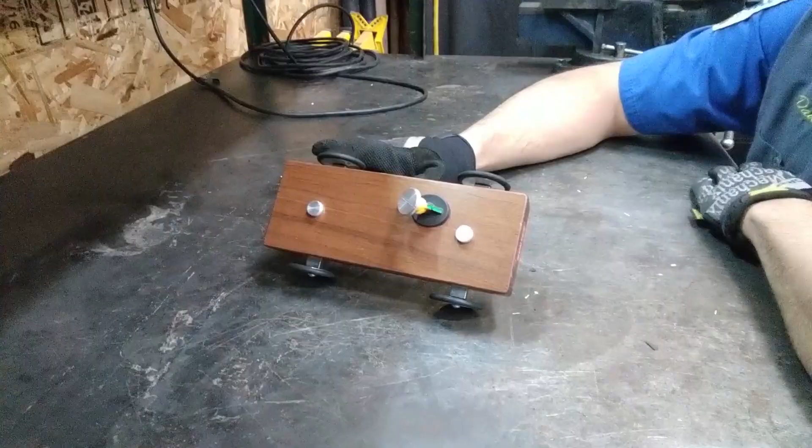In these exaggerated instances, it's a little easier to see visually how some of these tire wear angles can affect the tires and the vehicle's handling. So I'm going to start with this alignment model car from Hunter and talk about the most important angle that's adjustable on all vehicles. It's the only angle required to be adjustable on all vehicles, and sometimes the only one available for adjustment, and that's toe.

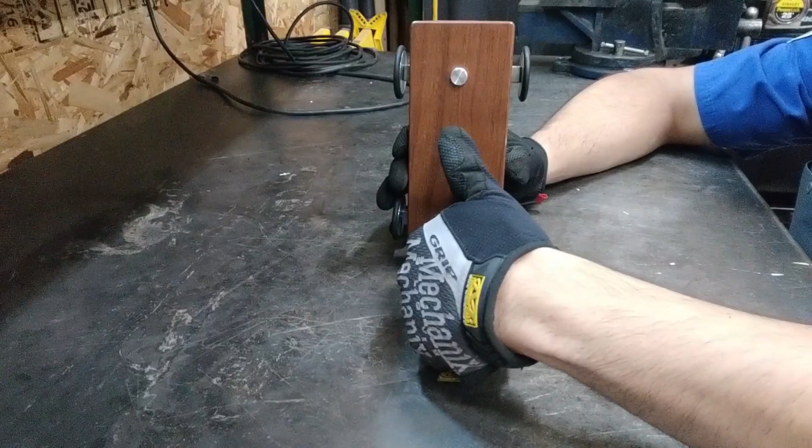There are two reference points we're going to use. The first is the geometric center line of the vehicle, an imaginary line drawn directly through the center of the rear and front axle, passing through the vehicle. The other is the zero reference line, represented by a true vertical line. So when we refer to some of these measurements, they may be in reference to a true vertical line, a zero reference line, or the geometric center line of the vehicle.

Toe is defined as the distance across the front of two tires compared to the distance across the rear of the same two tires, on the front axle compared to the rear. Referring to toe in that manner is also known as total toe, comparing one side against the other. Individual toe has to do with using the geometric center line and only referring to one wheel and its relationship to the geometric center line.

Individual toe is the distance across the front of a tire to the geometric center line compared to the rear of that same tire to the geometric center line. If those distances are equal, it has zero toe.

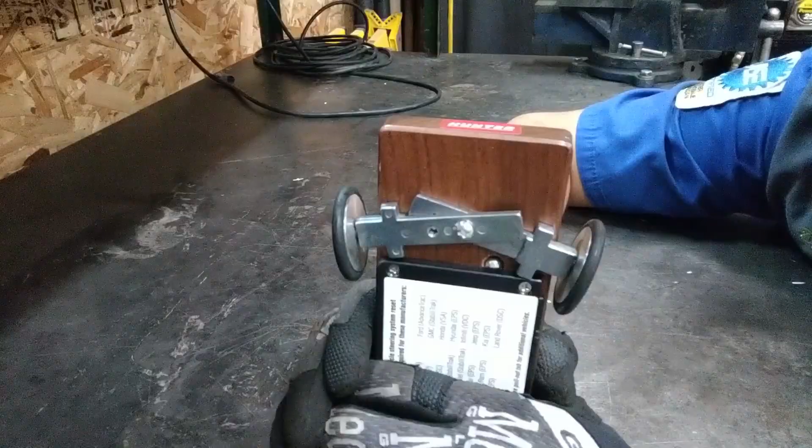So for real life tires: toe in means the front distance of the two tires is closer than the rear distance of the same two tires. Toe out means the distance across the front of two tires is farther than the distance across the rear of the same two tires.

What's this going to do when you're driving? If we picture a toe-in scenario and the vehicle is going straight, the tire is going to be scrubbing partially against the surface in a lateral motion as it rolls. The vehicle is going to prevent these tires from actually joining together on their intended straight paths.

And similar to toe out, they're not going to leave the vehicle. The vehicle is a rigid piece, and it's going to keep them all together. So what's going to happen is, let's look at this tire. As the tire is rotating this way, it's also going to be scrubbing along in this motion right here.

So if we think about the forces acting on that tire tread coming from the ground in this direction, it's going to take this outside edge and start scrubbing it. And so this tire, in an exaggerated manner, is going to be rotating and scrubbing forward.

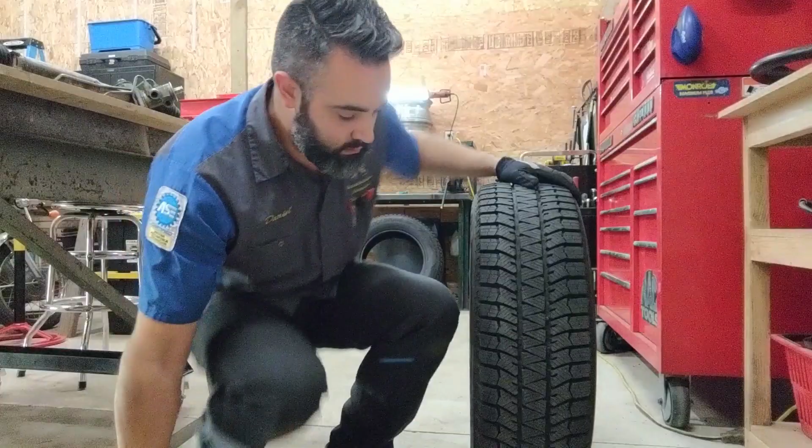Camber is the next angle I want to discuss. The definition of camber is the inward or outward tilt of the top of the tire in reference to a true vertical line as viewed from the front of the vehicle. So if you're looking head on to the vehicle, and let's say the vehicle is where I'm at, and this is the tire, the outward tilt is positive camber. The inward tilt of the top of the tire in reference to true vertical is negative.

Using a framer's square, zero camber is vertical. Positive camber is outward. Negative camber is inward.

Camber is a tire wear angle, but it has to do with the pressure on the tire surface that will wear the tire. A little bit one way or the other isn't going to drastically affect the tire, and again I'm talking about angles between 0 and 1 degree, plus or minus 1 degree off of 0. What will happen though, in an extreme scenario which we can actually see nowadays, the amount of pressure at that contact surface with the ground on a very extreme camber setting is going to cause excessive wear on that surface because it is taking more of the vehicle's weight and it's not evenly distributed across the tire.

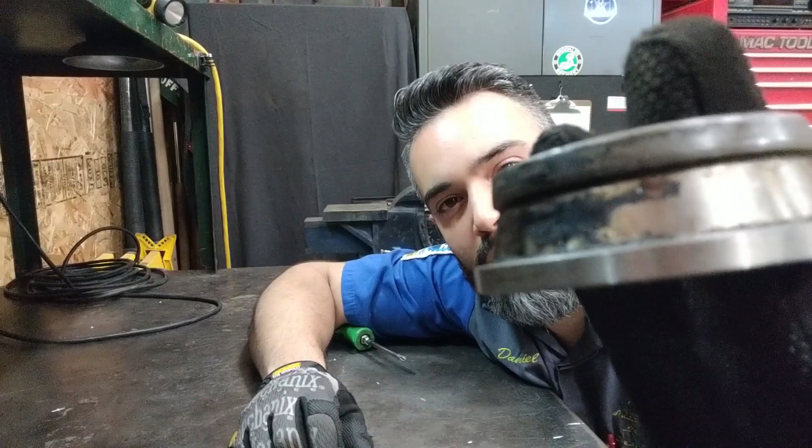One of the general rules about camber is that a vehicle will tend to pull towards the side with the most positive camber. So remember, positive is when the top of the tire is tilting outward from the vehicle. That can be illustrated by this. This is an inner bearing race from a tapered roller bearing. See some interesting spalling occurring there. No wonder this was in need of replacement.

A true vertical tire, or a tire with 0 camber, will have an even contact patch across the surface of the tire tread. Positive camber is going to act like a cone. Negative camber does this too, but negative camber, the way that the forces act from the tire tread back to the vehicle, don't influence it as much as positive camber does. So notice what that contact patch does to its rolling direction.

As the tire is tilted outward, that contact patch with the ground becomes distorted and takes on a conical shape on the contact patch of the tire, resulting in the force acting on the steering and suspension system from that positive camber and influencing the vehicle to pull in that direction. If it was even side to side, there wouldn't be any more pull one way than the other.

Excessive out of spec positive camber is going to also wear the tires just like negative camber would. The only thing is, with positive camber or less negative camber - because you can still have two negative cambers, just one a little less negative than the other - the pull will go towards the side of the more positive or the less negative. So it doesn't always need to be a positive value in order to be more positive; it just needs to be less negative or more positive. Generally what we're looking for is within half of a degree side to side, so our cross camber needs to be less than half of a degree to avoid that steering pull characteristic when performing an alignment.

In order to define caster, or the caster angle, we need to first define and understand what the steering axis is, because caster has to do with the degree tilt of the steering axis. Let's take a look at an example. I'm going to use the MacPherson strut as an example for measuring caster. Caster is determined by the steering axis.

The steering axis is an imaginary line drawn through the lower pivot point down here at the ball joint, and an imaginary line up through the top pivot point. So this one pivots up here on the strut bearing and pivots down here on the ball joint. Now that isn't directly in line with the strut body, since our ball joint is over here and our upper pivot is over here.

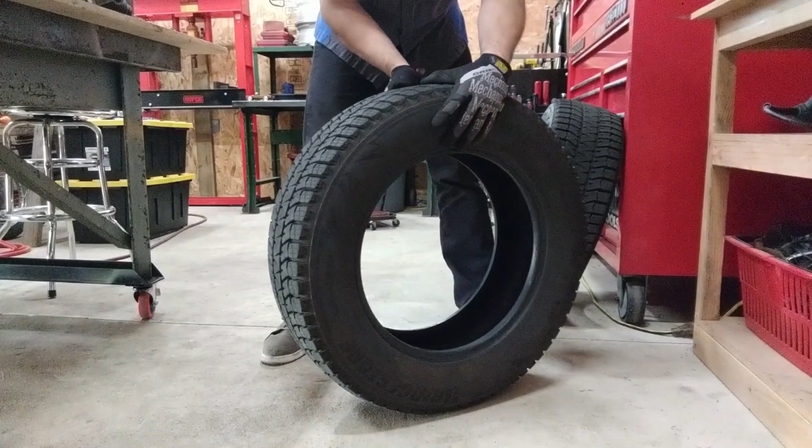The steering axis isn't something you can see just by looking at it or putting up a measuring tool. The steering axis isn't always going to be a vertical pivot point directly in line with the center of the tread. You might guess where I'm going with this. We can't look at this angle directly, but we can see where it pivots in the steering at the top and at the bottom, and we can imagine the line drawn between those two pivoting points, though we can't know what that is for sure.

So how are we going to do this on the alignment machine? Well, it's a dynamic angle. So just by looking at it and mounting up the equipment, we cannot tell what the steering axis is based off of that information.

The definition of caster is the forward or rearward tilt of the steering axis in reference to a true vertical line, as viewed from the side of the vehicle. Picture a motorcycle: the handlebars are located somewhere behind the front wheel to whatever degree, and that degree can be considered caster, because this is the operating angle of the steering axis.

Picture a street bike where the angle is very steep, almost vertical, compared to a modified chopper where it's drawn out and acting on the front tire from a ways back. That would be positive caster. Negative caster would be if we were ahead of the wheel and tilted forward as viewed from the side of the vehicle. Thinking about the forks on a motorcycle is a pretty easy way of understanding it.

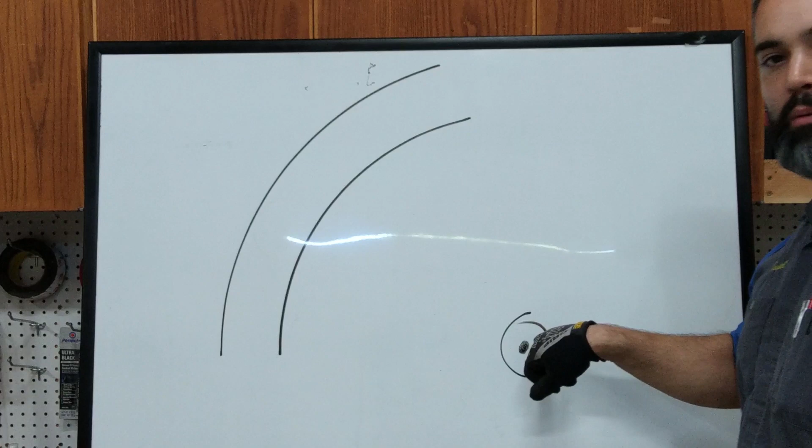This is the center point for the radius of each of those arcs. The inside radius is shorter than the outside radius, so it's making a tighter turn compared to the less aggressive turn at the longer radius.

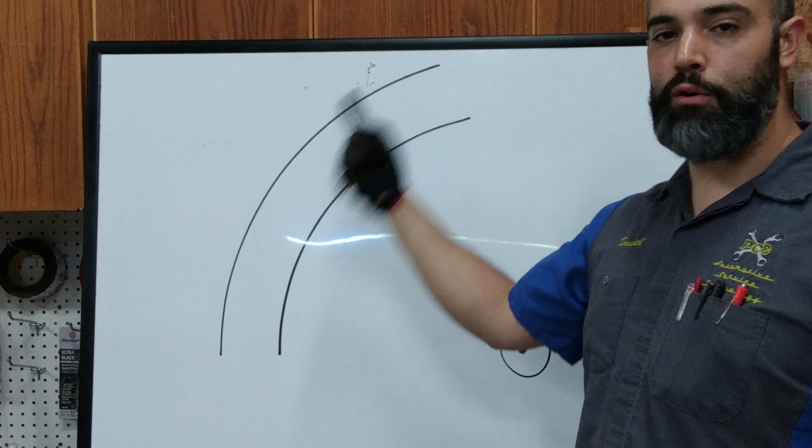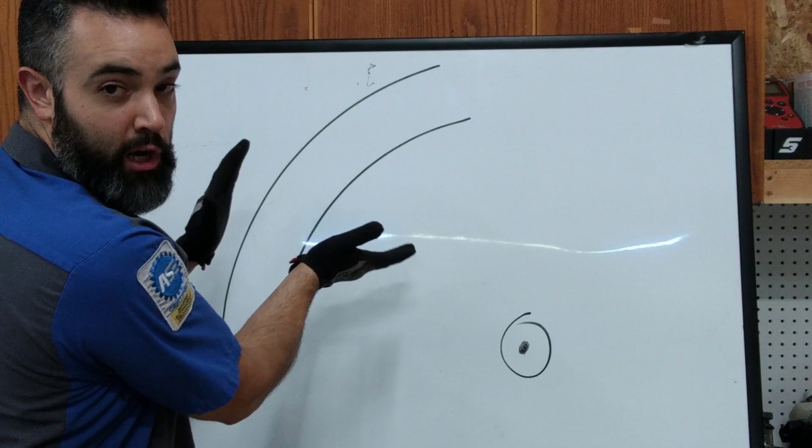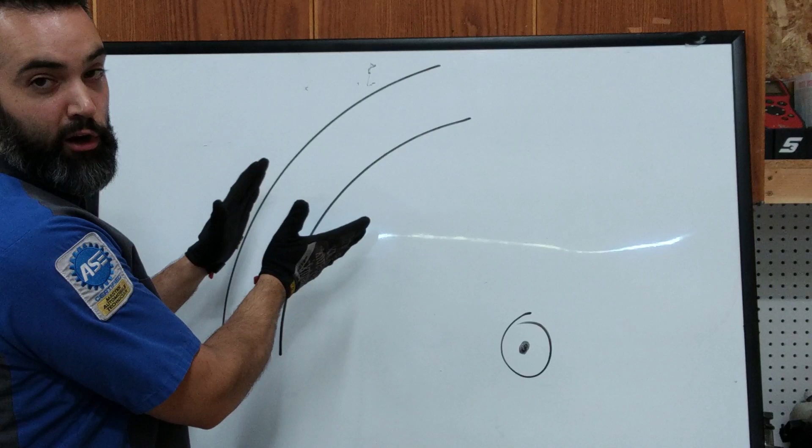So if the vehicle is turning about a point, the inside wheel needs to follow this curve and the outside wheel needs to follow the other curve. The result is the inside curve is a sharper turn than the outside, so the inside wheel will need to turn sharper than the outside wheel. They'll both turn, but the inside turns sharper. Since the front of the two tires will be larger than the rear of the same two tires, not parallel, this is what we call toe out on turns.

Abbreviated TOOT, or toot. In the PDF slideshow that goes along with the alignment topic, it will go further into diagnostic angles. Reading the chapters on alignment and going through more of these slides with diagnostic angles will be helpful in the future when you're working in the lab. We're not going to get too deep into that at the moment.

I want you to understand the basics of a four-wheel alignment and how that process goes. So I will walk you through that process with a vehicle at the school on an alignment hoist, running through the procedure. Remember: tire pressure affects it. Do an inspection before getting on the alignment hoist to find any loose, worn, or possibly bent components. Road test the vehicle to find out what it's doing before you align it, so you have something to compare it to. And the alignment process is going to be rear, camber, and toe.

You're likely not going to find a caster angle on the rear unless you have some extreme steering on the rear axle. So you do rear camber, then rear toe. Then you go to the front and do front camber or caster first. So the order is camber, caster, caster, camber, then toe.

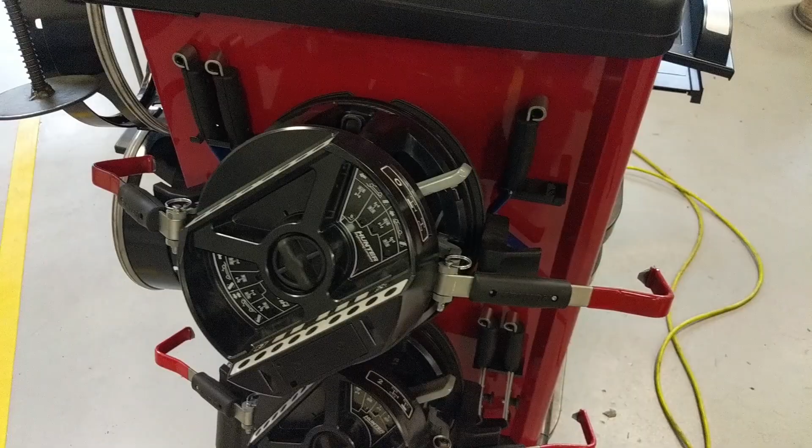It may be helpful to have somebody spot you when pulling onto the drive-on hoist so the vehicle is centered as best as possible. The different colored extension arms for the alignment heads that attach to the wheel are designed to fit different diameter wheels. Located within view of the driver is a corresponding color-coded sticker on the alignment hoist where the center of the wheel should be stopped, depending on the overall diameter of the wheel.

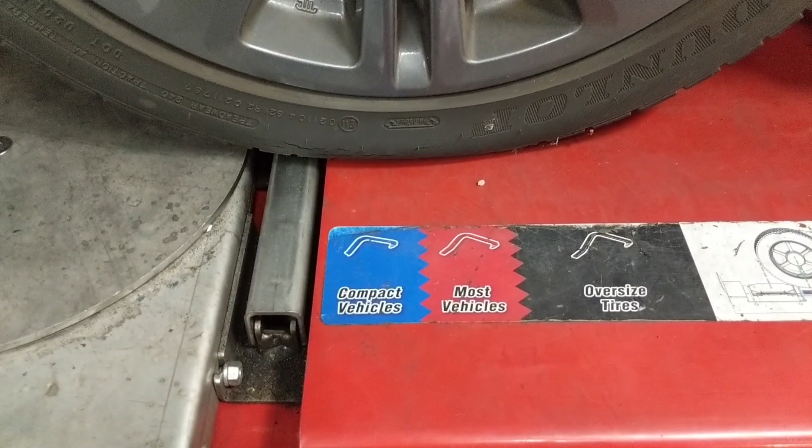Compact vehicles will have smaller wheels and are blue. Most vehicles fall in the red category, and oversized tires, like trucks and SUVs, tend to be more in the black range. A common safety practice in a shop: when a vehicle is pulled into the shop, the transmission should be in neutral if it's a manual transmission, with the parking brake engaged.

On the hoist, the vehicle should be chocked, and the chocks are only necessary on one wheel. It's best to keep the wheel chocks located near the alignment controls. That way, less time is spent running around the vehicle and walking around the hoist in order to chock and unchock the wheels.

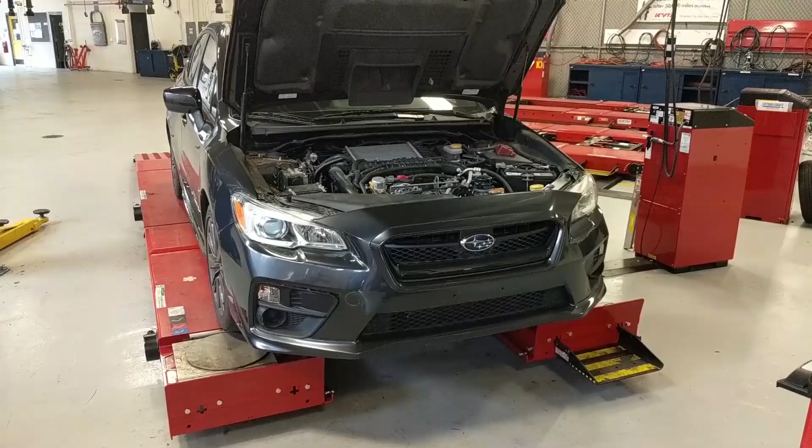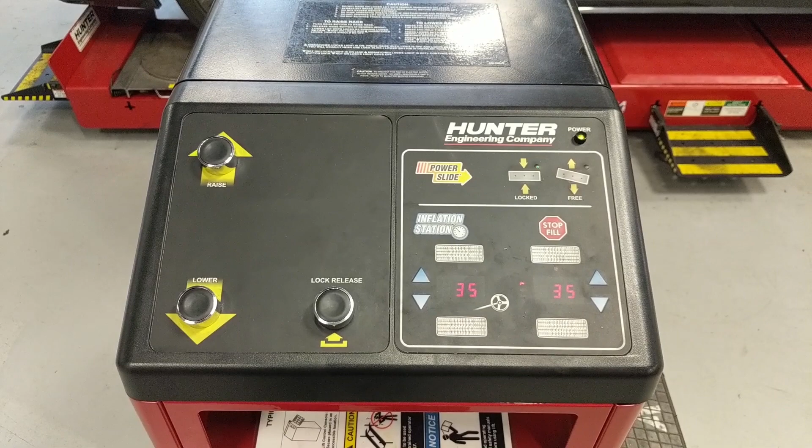The alignment cameras on the aligner are calibrated to read the alignment heads when mounted to the vehicle wheels. The alignment cameras are unable to read the alignment heads mounted to the wheels when the hoist is all the way down. So the vehicle needs to be raised up a certain amount for the alignment heads to even register with the aligner. First we'll raise the vehicle to a comfortable working height so we can mount the alignment heads and calibrate the system for the vehicle.

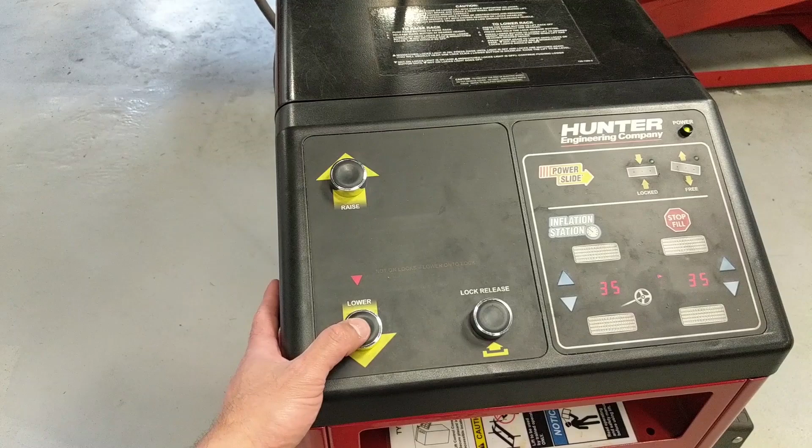Whenever working on any hoist, whether it's a drive-on hoist or a hoist with arms, always lower the hoist back onto the locks. The first step will be to set the correct tire pressure.

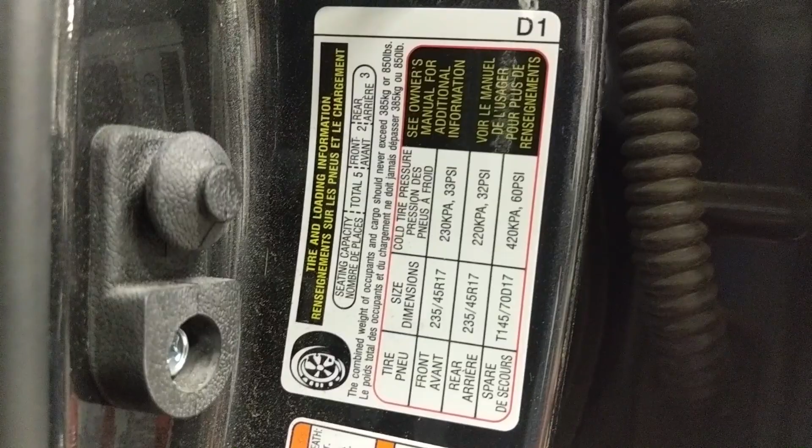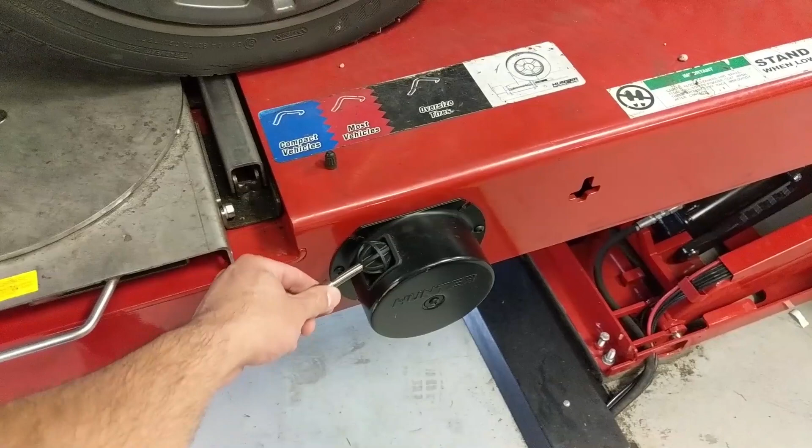It looks like we should be at 33 psi in the front and 32 psi in the rear. Here's a nifty feature from this alignment hoist - on the control box, we have controls to set the tire inflation for the front axle and the rear axle: 33 for the front, 32 for the rear. Located near each wheel is a retractable hose assembly, and as we attach all four of these, they will automatically set the tire pressure to the vehicle's specifications. The hoist will automatically set the tire pressure to the desired settings for the front and rear axles.

Once this process is complete, they should be disconnected and the valve stem caps should be reinstalled. If the hoses are left on, the machine will stop trying to regulate the pressure, and in doing so will allow air to leak from the wheels through the hose assemblies, and the tires will be flat. So when you're done with this step, disconnect the hoses and recoil them back into the retractor assembly.

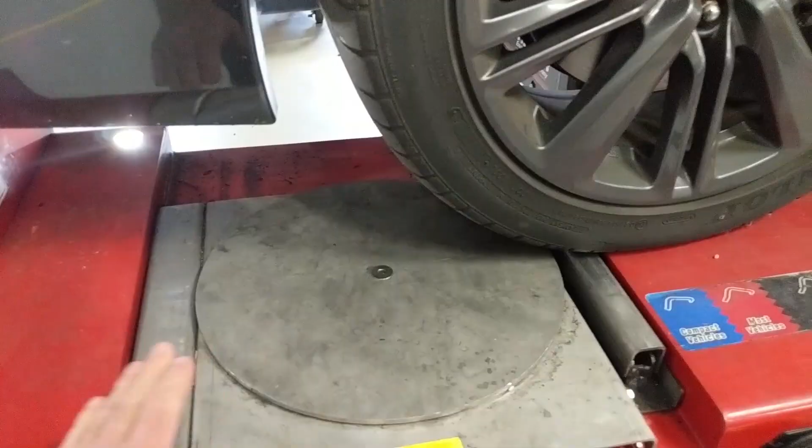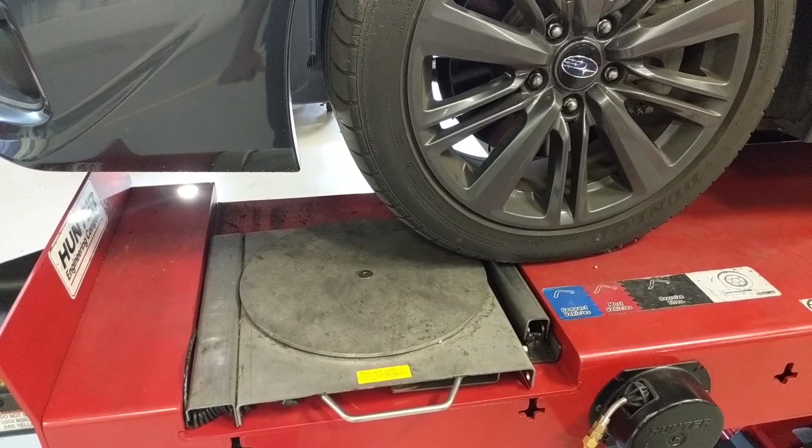Before mounting the alignment heads, it's important to center the turn plates for the front wheels. The turn plate is designed to pivot on the center, and when in the unlocked position can slide around in multiple directions so the alignment adjustments can be made with the vehicle weight on there without the tires limiting how the adjustment is made or how difficult it is to make. These should remain in the locked position until ready to perform the adjustment on that particular area, positioned with the center line of the tire by sliding in or outward.

As the vehicle is rolled onto the turn plate during the quick compensation, it will already be centered with the tire tread and in an optimal position for the alignment. Do this on both sides.

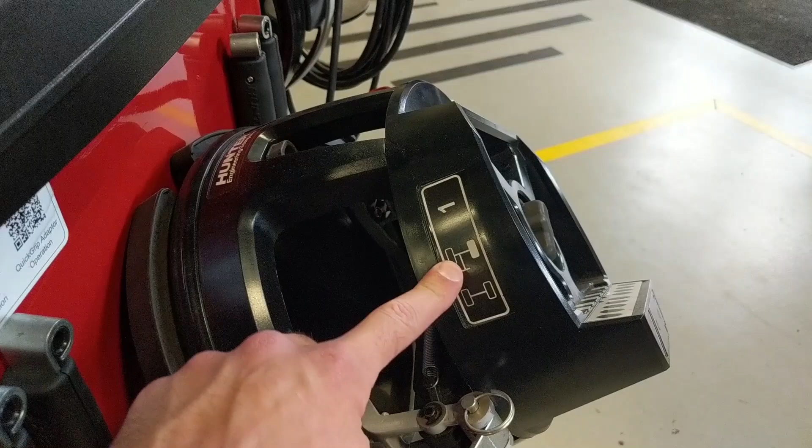The alignment heads are marked with a label that specifies the location they're to be mounted on the vehicle. This would be the rear left, this would be the front left, front right,

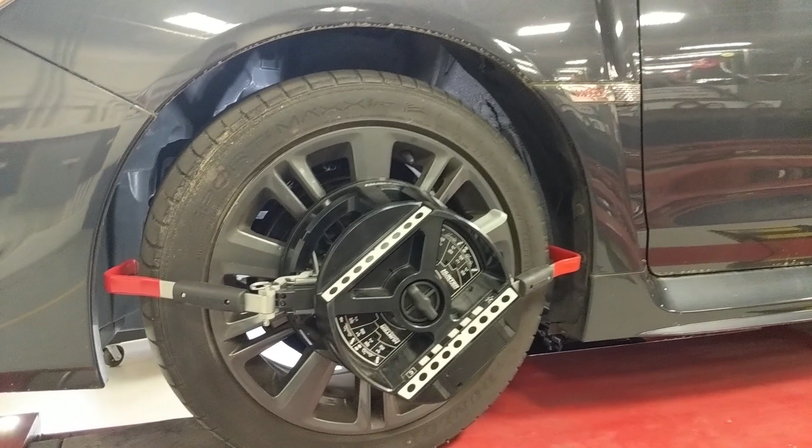When mounting the alignment heads, position the arms at the 9 o'clock and 3 o'clock positions and do your best to center them on the wheel visibly. They don't need to be perfect, but close is always better than far off. Once mounted and in a desirable position,

Lock the tension locks so they have the least chance of moving. The alignment heads have different settings on them. They can be removed while still mounted to the wheel in order to mount different types of adapters for different types of adjustments.

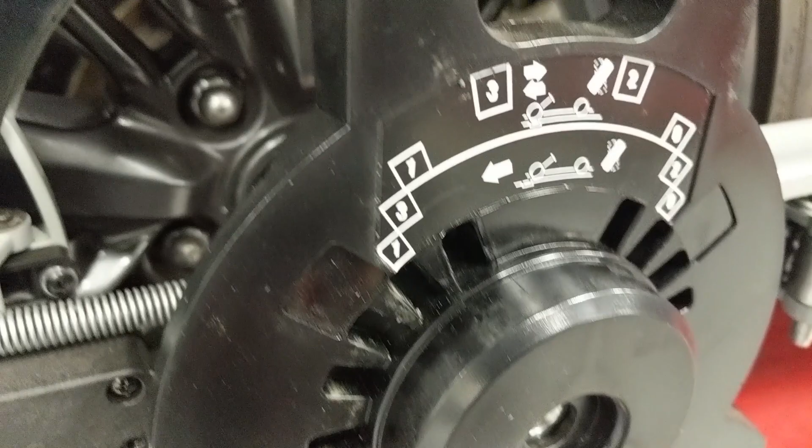Always note the position and the number for each alignment head, and make sure that your position number, in this case 0, matches up with the settings on the side of the alignment head. 0, front axle. On the home screen of the computer for the aligner, open WinAlign.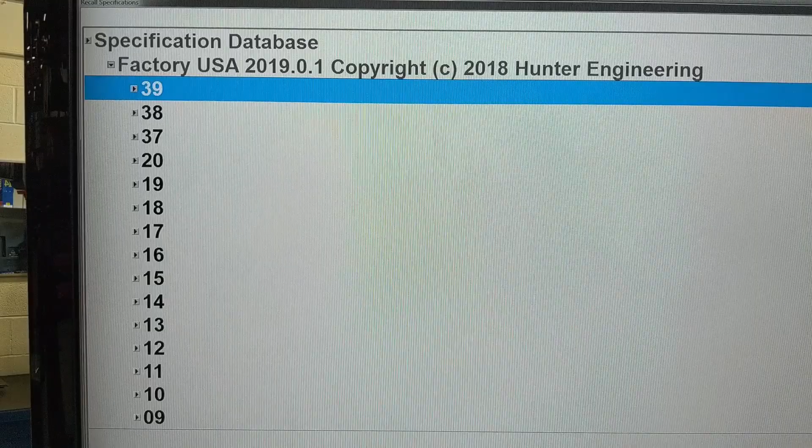Select Begin Alignment, and then enter the vehicle information. Another way of entering vehicle information is to scan the barcode on the VIN plate. This is done with the rechargeable tool and scanning the barcode on the VIN plate.

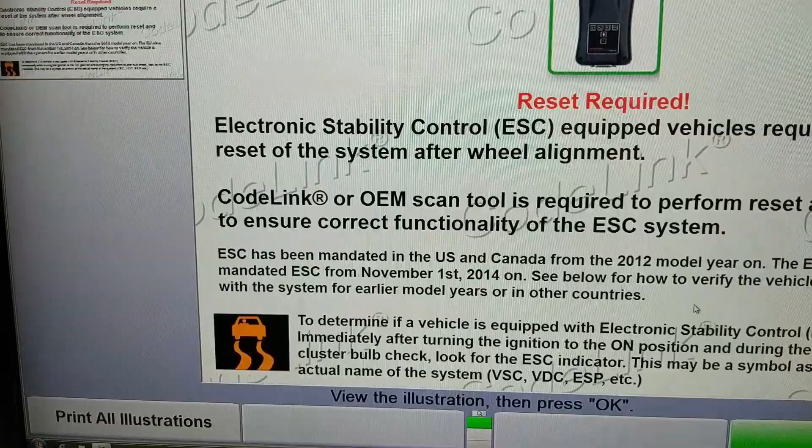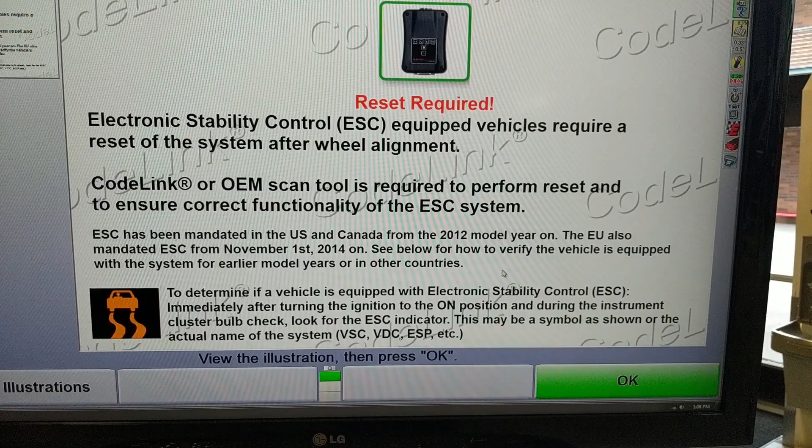This is a 2013 model. Subaru. Impreza WRX. And we have a notice here that there is an electronic stability control equipped vehicle that requires the reset of the system after wheel alignment. We'll get more into this later as we cover the automatic systems of the vehicle that are in charge of keeping the vehicle on the road and safe for the driver.

For now, we'll focus on the basic four-wheel alignment. The first menu shows our specifications and our tolerance above and below for each measurement. These are decimals of degrees, so we're talking less than a degree of tolerance in either direction.

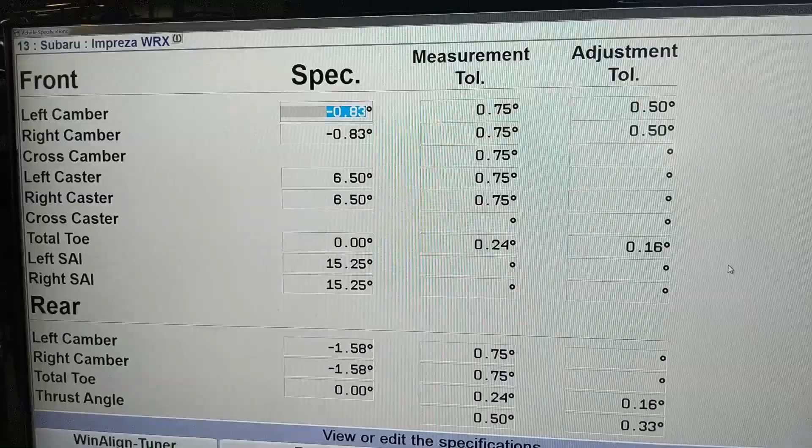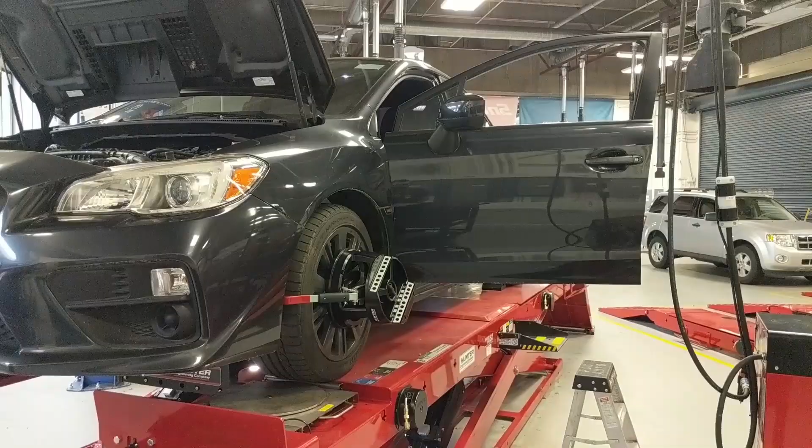Follow the prompts to mount the sensors. If the aligner cannot see an alignment head mounted to a wheel, there's likely something blocking the view or the vehicle is not raised high enough. An open door is often the cause of blocking a sensor, or somebody standing in the way.

With the vehicle in neutral and the parking brake disengaged and the ignition unlocked to allow for steering of the vehicle, now we can compensate the alignment heads to the machine.

The aligner doesn't know the exact position of the wheels until they're compensated. By rolling the vehicle forward while the cameras are watching the targets on the wheels, they can then calibrate to the position of each wheel. That way, any adjustments that are made can be read by the machine and displayed on the screen.

A lot of the static angles can be measured during the calibration, but angles like caster, which are not visible unless there's motion of the pivoting of the steering, the machine doesn't know exactly what the caster measurement is. So we still need to take further steps to measure certain angles to know where we stand with our alignment angles at the moment.

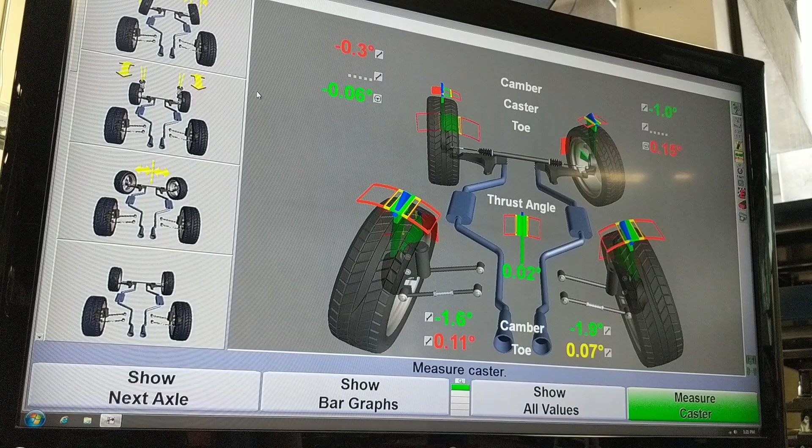This view has not been a very good one to use, and for me personally, I feel it's because of the amount of clutter and lack of information clarity in order to use this screen. I prefer the bar graphs. You might prefer this screen, but if I'm helping you with an alignment, I'll switch over to the bar graphs because it's a lot more clear to see what's being conveyed through the information on the aligner.

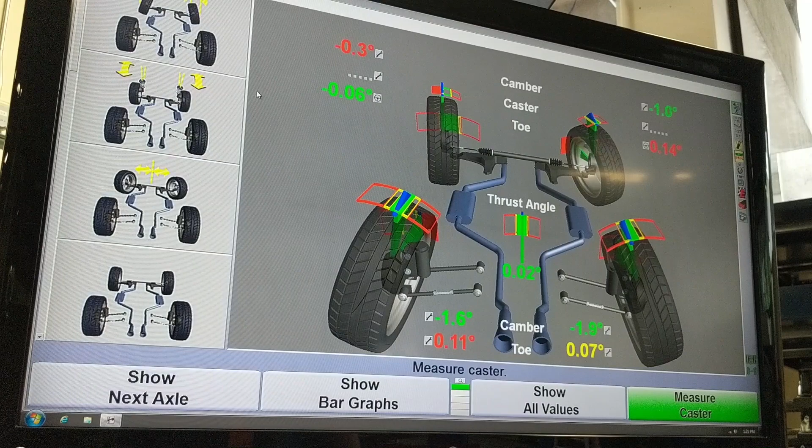Our next step is to measure the caster. Always follow the instructions that the aligner is telling you. It's important to follow all prompts and directions and click to the next step as needed on the aligner in order to get accurate results. Otherwise, you may end up going back into the aligner and having to redo several things that you've done in order to get an accurate measurement.

Install the brake pedal depressor, steer the wheels as directed. The brake pedal depressor is being installed to prevent the wheel from turning. Remember, the wheel is on the slip plates, and if we are moving the steering and the wheel rotates on the bearings, then that's going to skew our measurement because the

alignment head has already been compensated to its position. So locking the front wheels and making sure they don't turn or rotate during the alignment process is key to keep things consistent and accurate.

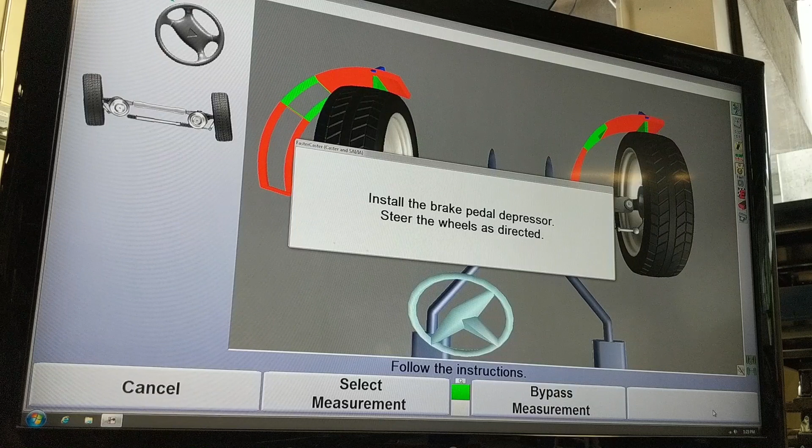With the brake pedal depressor installed, we can move on to measure caster. Installing the brake pedal depressor will illuminate the brake lights. These will drain the battery if left on for a long enough period of time.

In order to prevent the battery from draining too much, a battery charger can be hooked up to the battery during the alignment, or the brake light fuse can be removed to prevent the lights from illuminating. Just remember, it must be reinstalled for safe operation of the vehicle once it's released to the customer.

Inevitably, this will drain the battery, and sometimes you will have to recharge the battery and reprogram anything that was lost from memory.

Following the directions to measure caster, steer the wheels as directed through the open window, careful not to block the beam, or by manually moving the wheel and pivoting the steering from the wheel. Either way, it's important not to block the beam.

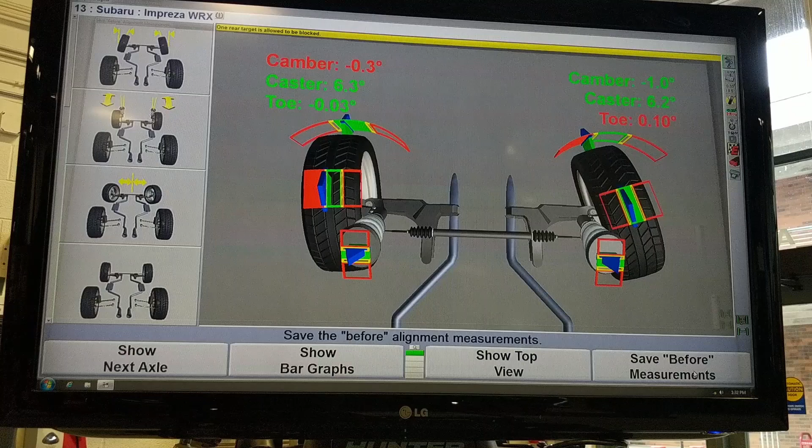Most of the time you won't have a caster option for the rear since the rear doesn't normally steer. Some vehicles do, they may have a caster angle. So looking into the adjustments for this, the manufacturer does not specify a rear camber adjustment.

The rear adjustment is what sets our thrust angle. Any thrust angle is going to result in the steering wheel being off center, with the front trying to follow where the thrust angle is pointing. And the thrust angle is determined by the rear wheels.

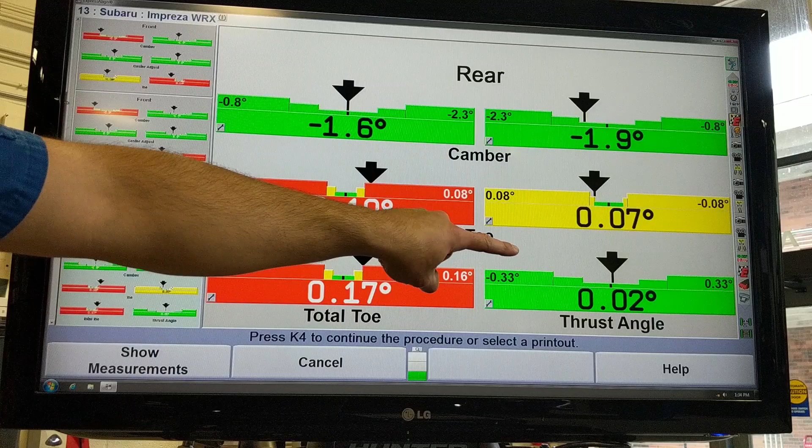Our toe is out of spec on the rear. The difference in toe of 0.10 to 0.07 degrees is what's resulting in our thrust angle. The center notch, the center reading, is going to be our optimal point within our specifications.

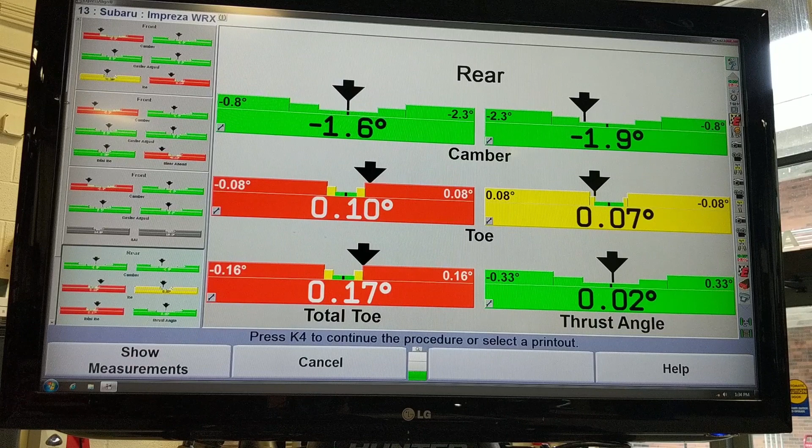It's important to be in the green zone. It's more important to be accurate to the specification within your tolerances side to side. Before we make any adjustments, we want to make sure that the slip plates are free and not locked, so we're not trying to adjust against the traction of the tire in contact with the hoist.

In order to position the front of the tire inward or outward compared to the rear of the same tire, in reference to the opposite side or the geometric center line, this is our toe adjustment. So this is the front of the tire, this is the rear of the tire. We need to control how far out or in the front points.

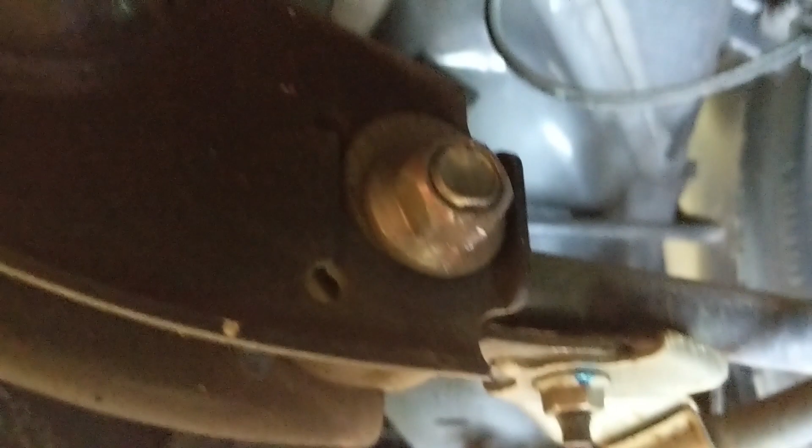This link here, the cam eccentric, will change the lateral position of this link, which is on this extension here from the knuckle, and will pivot that tire in or out as we make the adjustment.

This is the nut that loosens and tightens the adjustment. The bolt head on this side is what needs to be rotated. And the bolt is splined to the eccentric on this side and the eccentric on the other side, so the nut does not need to turn with the cam eccentric.

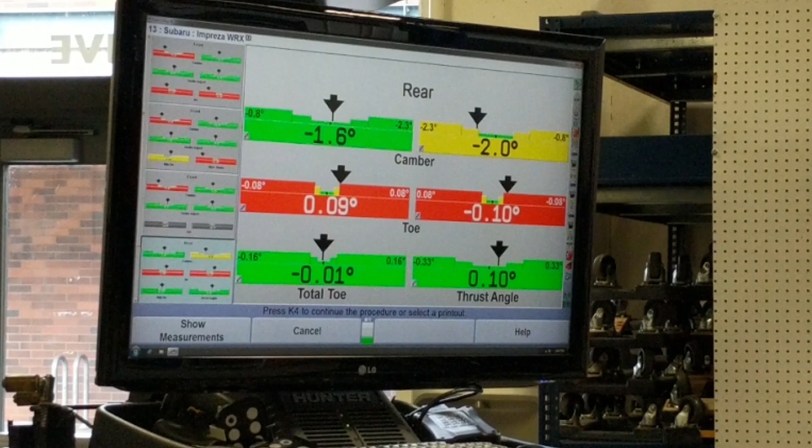So next I will adjust the right rear toe to the specification shown, and then I'll adjust the left rear toe, and hopefully by setting those to the specification, our thrust angle will be 0.

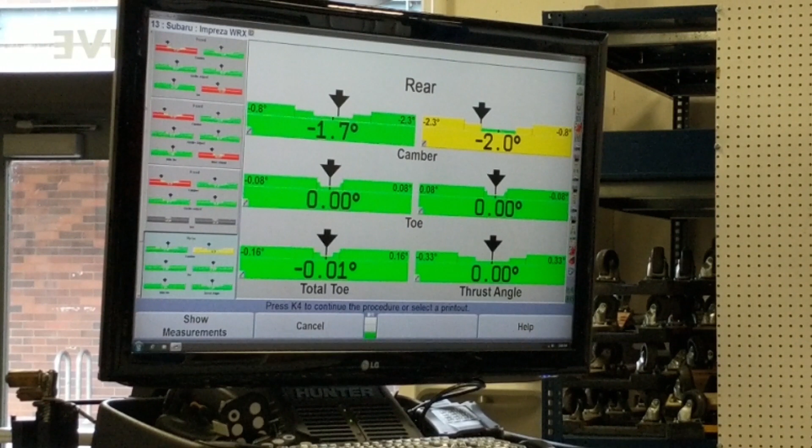Our rear toe measurements are hovering right on and off of the 0.00 degree mark. Notice how our thrust angle is now 0.00 degrees. This means our thrust angle is in direct alignment with the geometric center line of the vehicle.

Next, we'll move on to the front axle. We will be adjusting camber, then caster, then toe, because adjusting camber can affect toe, and same with adjusting caster. So toe will be our last adjustment.

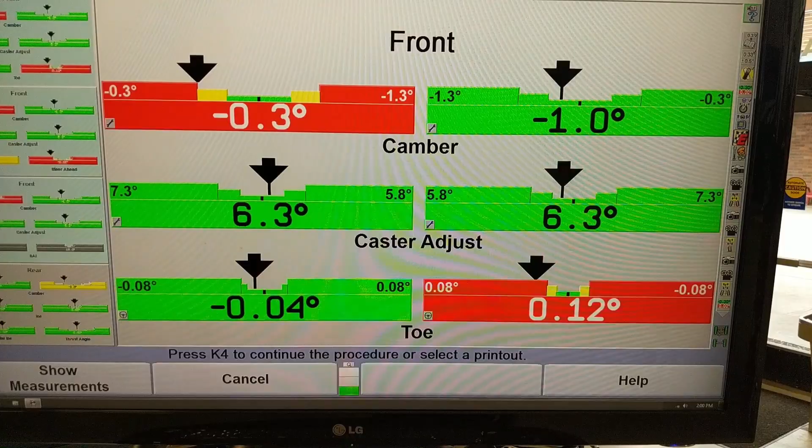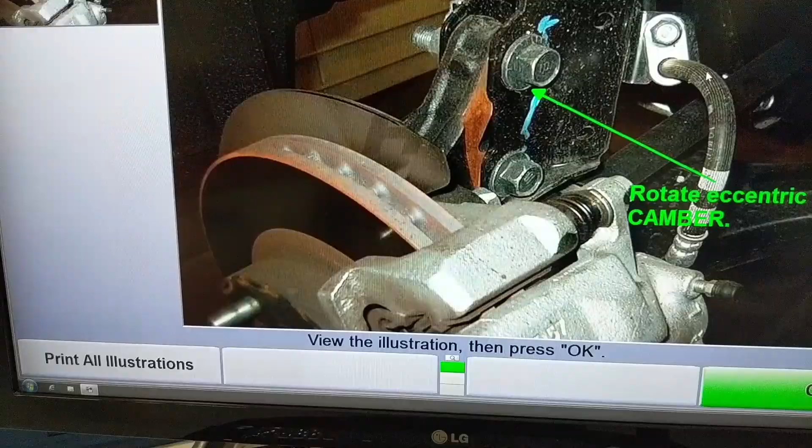The illustration for the front camber adjustment is done at the base of where the strut mounts to the steering knuckle. Of these two bolts, the lower one is a pivot point and the other is a slotted adjustment. Rotating this cam will move the upper portion in relation to the bottom portion, pivoting like this, and that affects the inward or outward tilt at the top of the tire in reference to a true vertical line. This involves loosening one bolt to allow movement of the upper piece, then loosening the top one and rotating from the bolt head side so both cams spin from the front and rear, adjusting the position of the steering knuckle to get our camber measurement within tolerance or right on specification.

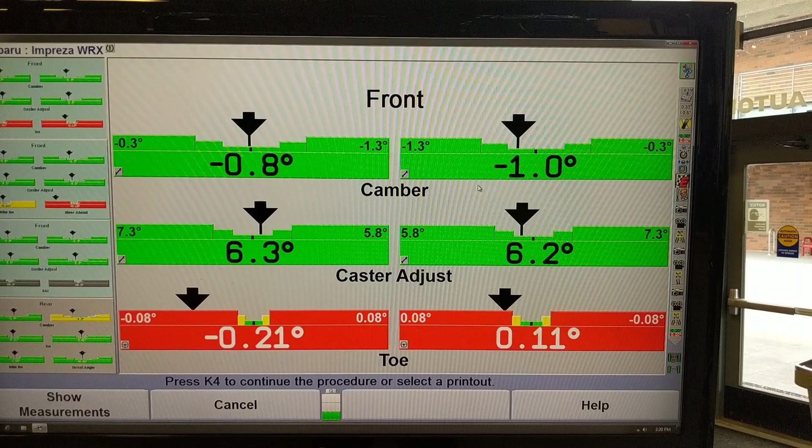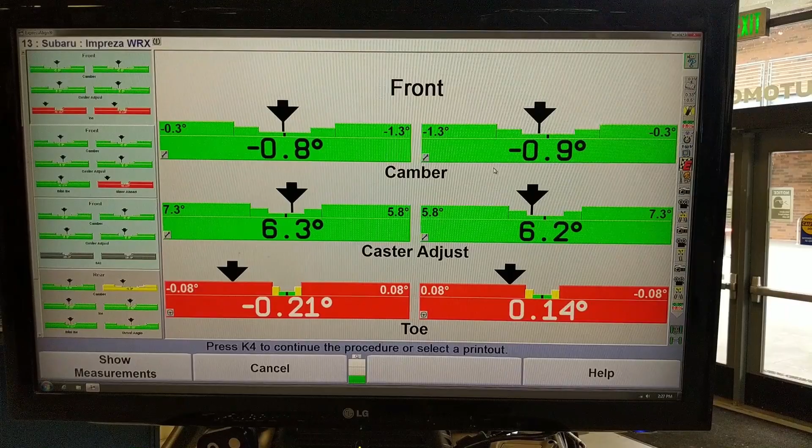With the left front camber adjusted to specification, we'll see if we can dial in the right side, but at least we're now within our 0.5 degree tolerance on cross camber. After working on the right front side, we were able to improve it by 1/10 of a degree. So at this point, we're close enough within spec, plus our most positive camber is on the left side.

We have some road crown that might act in our favor to keep the vehicle tracking straight on most road surfaces. Our caster does not need to be adjusted, and while we're at it, let's just see if there is a caster adjustment available for this vehicle.

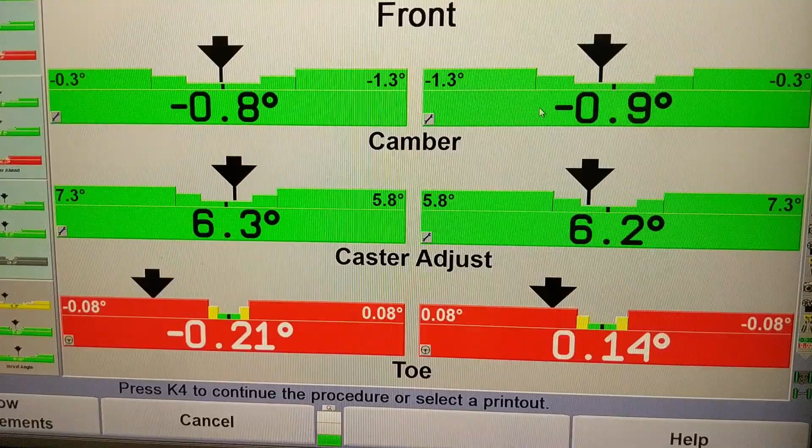Does not specify a front caster adjustment. All right, well what about? There are no tools defined in the database for the selected vehicle and angle.

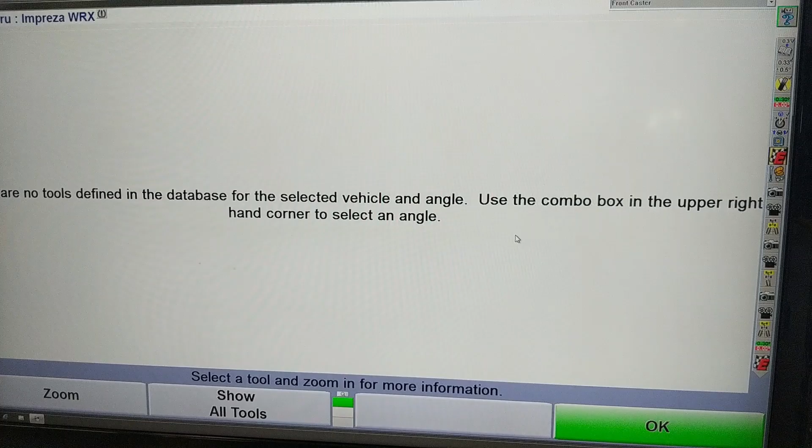So with that, we can assume that if we were out of spec significantly, there might be a damaged or bent component somewhere, because there's no way to adjust it and nothing available in the aftermarket as far as a part or kit in order to gain adjusting ability on the front caster angles.

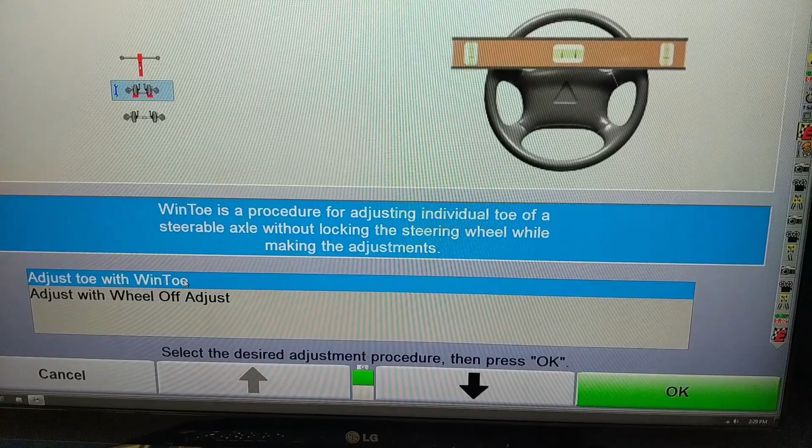So we'll move on to the toe. For toe, we're going to make additional adjustments and adjust with WinToe. This is a procedure, and it requires following all the prompts in order to do it correctly. WinToe is a procedure for adjusting individual toe of a steerable axle without locking the steering wheel while making the adjustments. The other way to do this is to install the steering wheel locking tool and adjust each the left and the right front toe to specification, then double check it.

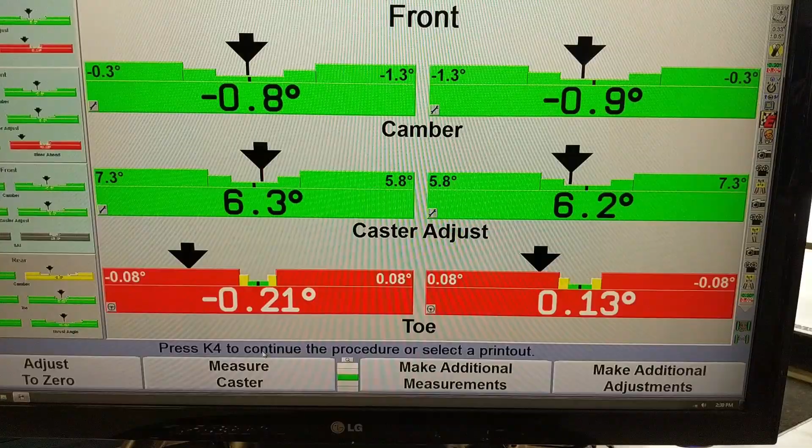So let's follow the procedure for leveling and locking the steering wheel. Start the vehicle so we can use the power steering system. We'll give the steering wheel a nice eyeball, make sure that things line up and that it doesn't look like it's off center. Looks good to me, we'll lock it right there. Engine off.

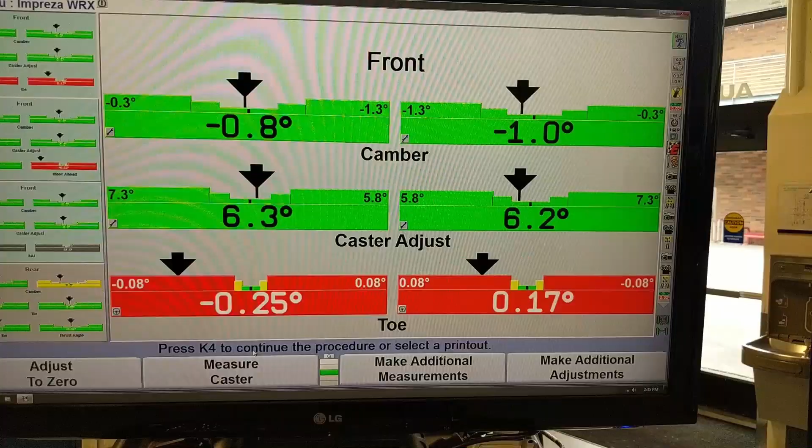If you notice, our left toe and our right toe are out of spec in the same direction. This one is negative, this one is positive. So the left wheel is pointing out and the right wheel is pointing in, meaning they're both pointing in the left direction.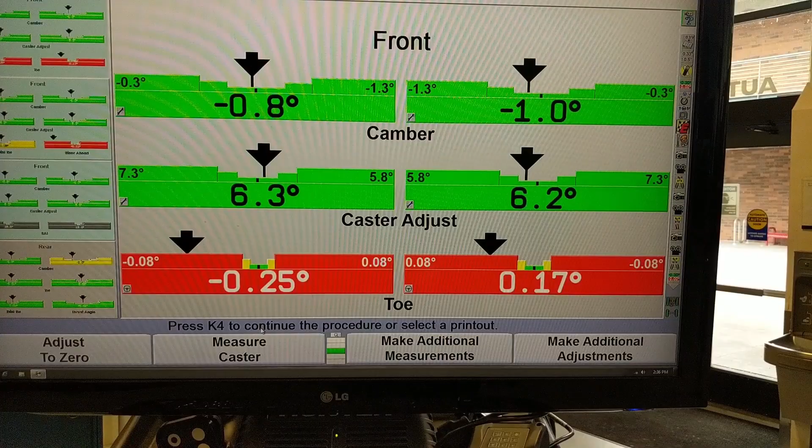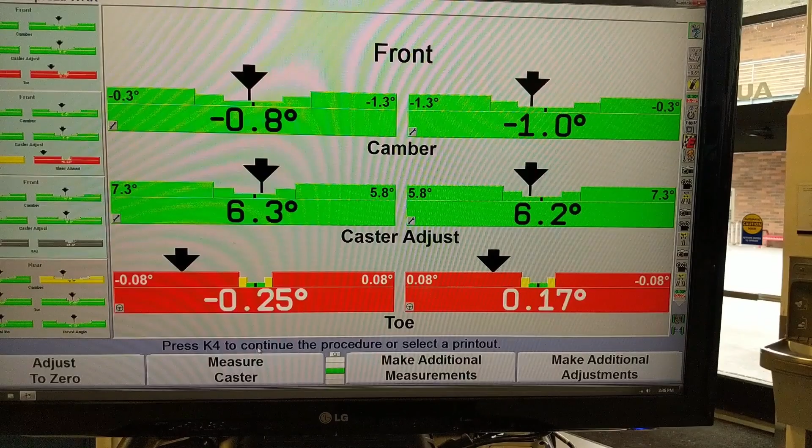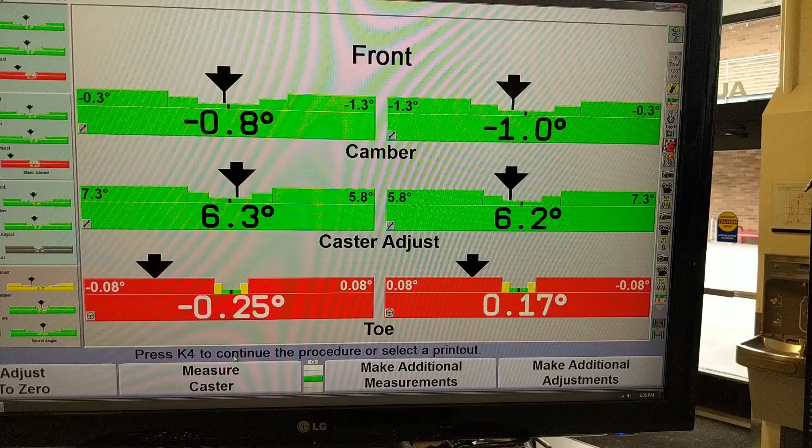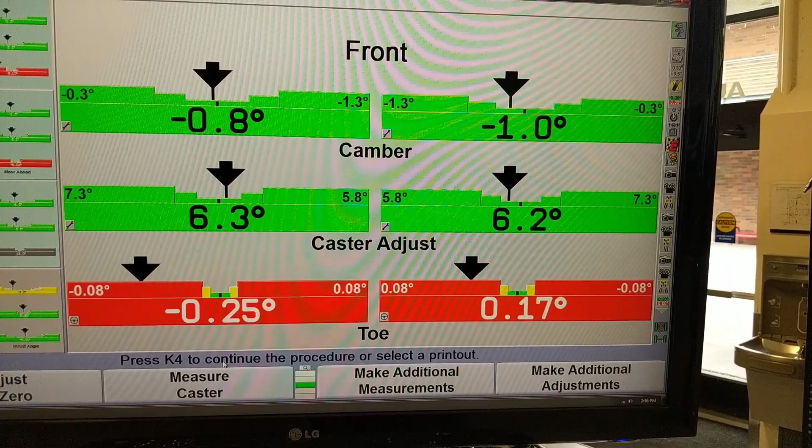What this means is that the steering wheel was off center to the right before we centered it. The steering angle sensor is calibrated to the 0 degree position as an input to systems that use that angle sensor, like vehicle stability control, traction control, and in this case electronic skid control. If we were to skip the calibration after making a mechanical adjustment, our new 0 point from the mechanical adjustment will not match the 0 degree mark calibrated into the angle sensor of the steering wheel. This would input false information for any system using that as an input and would likely result in warning lamps or irregular vehicle behavior when driving. It may even cause the vehicle to self-apply the brakes as a safety feature because the vehicle thinks it's making a constant turn while going straight.

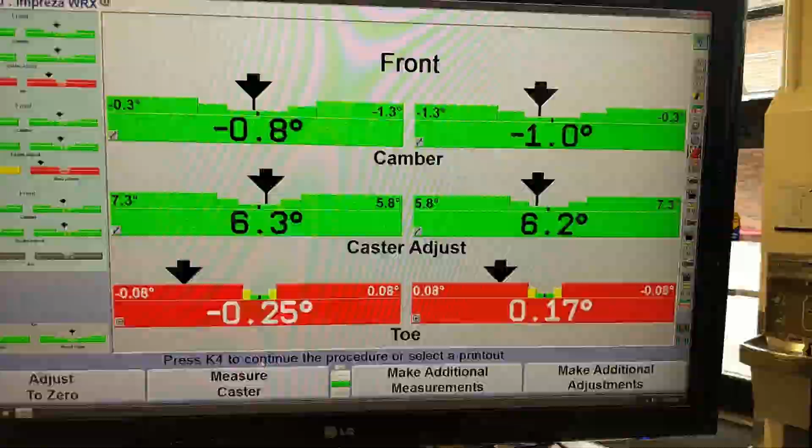So now we will move on with the mechanical toe adjustment and get it within spec for our steering wheel position in the straight ahead position. To make it easier on myself, I'm going to double click on this left front toe adjustment so that it takes up the entire screen and is easy to see.

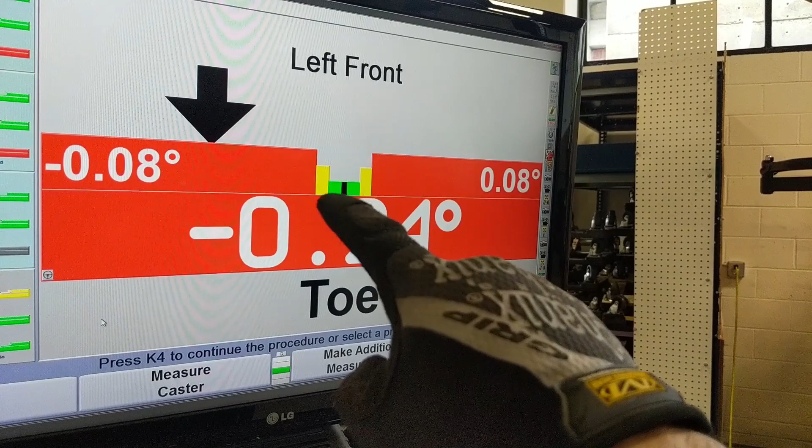Sometimes you can select a setting on the aligner to adjust to 0. That may be an option, but the other way is to look at your negative tolerance and your positive tolerance and find the middle point, and that is your ideal specification. In this case, 0 degrees is our midpoint between negative 0.08 and positive 0.08 degrees. So let's adjust this to 0 degrees.

First, the jam nut needs to be broken loose from the tie rod end, the outer tie rod end.

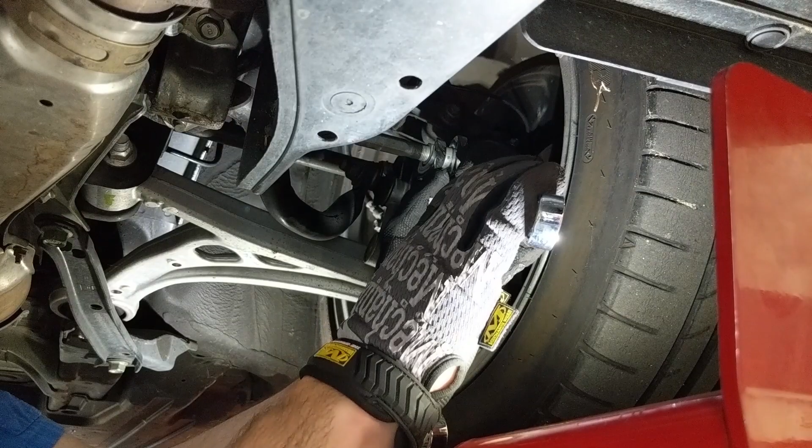That was really tight. We'll back the jam nut a little ways off so it doesn't interfere with our adjustment. Now we can make our adjustment by rotating the inner tie rod end on this hex.

With the negative toe reading at this wheel, that means it is pointing outward. In order to point it inward, we need to shorten the distance. So while holding the outer tie rod in a neutral position, we will thread the inner tie rod end inward.

So we get close to our specification. When setting the jam nut, you may be within spec before you set the jam nut, but the jam nut is going to lock the thread. So it's going to take out whatever play there is in the threads.

Since I was just bringing this together and I bring the jam nut in and tighten it against the outer tie rod end, that may take up the slack in the threads in the opposite direction that I made the adjustment. So depending on what your adjustment is, your jam nut will likely affect your overall reading.

So you may have to lock it, look at the reading, loosen it, make an adjustment, and lock it again, and do that until you land with it in the locked position at the specification needed.

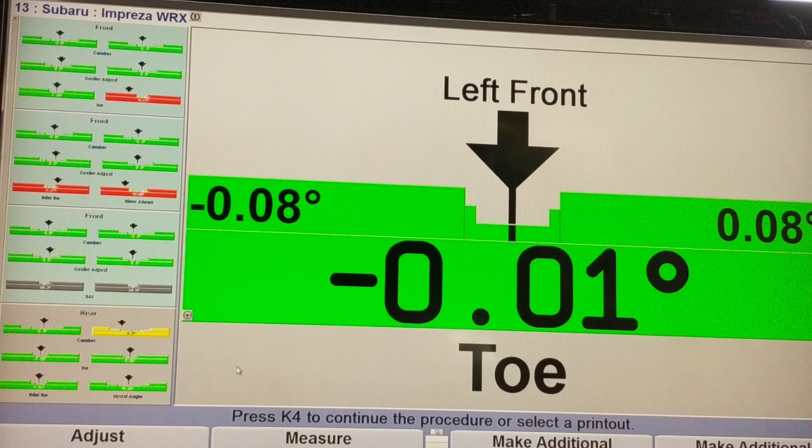I had a camera malfunction, so I wasn't able to capture all of the adjustment of the toe. But you can see that the toe values are bouncing off of 0.

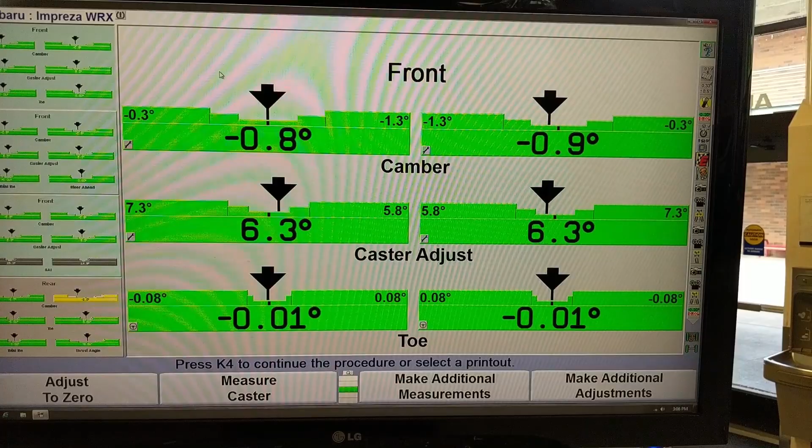You may not get it exactly to stay there 100% of the time, but as long as it's floating across the 0.00 mark, we want that specification adjusted to the hundredth of a degree, because that is a tire wear angle, and the most tire wear will occur if that angle is out of spec.

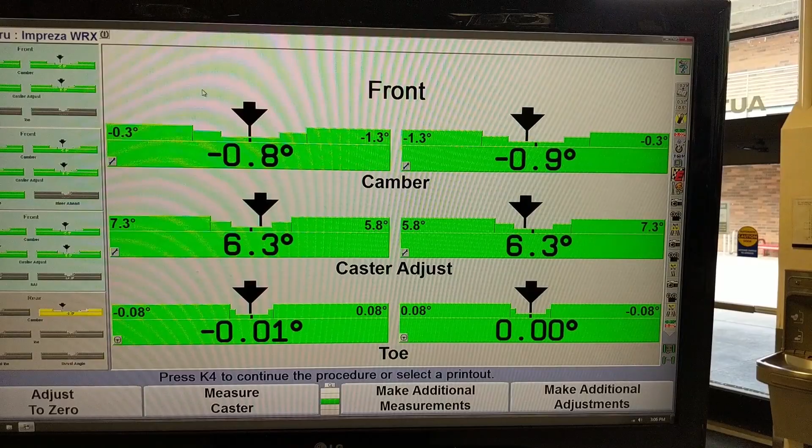Every vehicle has at least a front toe adjustment. It may not have any other adjustment, but front toe is always going to be an adjustable angle.

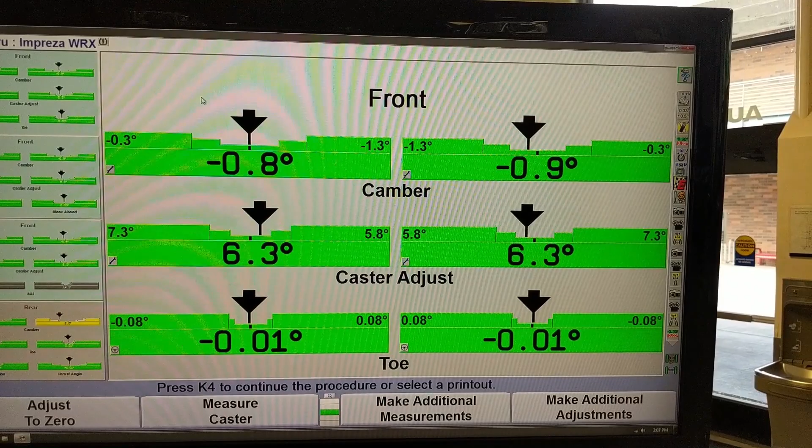So now we can continue with taking the alignment heads off, and test driving the vehicle will be the final step in the alignment procedure, to make sure that there is no pulling or drifting, that the steering wheel is straight, and that nothing else is of concern that would need to be adjusted on the alignment rack.

Performing a test drive and a thorough visual inspection prior to setting the vehicle up for alignment is where you'll find loose components or indications of bent or worn out parts, like bushings, a bent tie rod, or a bent suspension link, that could lead to uneven tire wear or play in the steering or suspension.

If there is anything loose in the suspension or steering system, that play is going to become apparent when you're trying to make an adjustment, and you may be chasing an adjustment one direction then the other across the specification to both outer limits of the tolerance.

If this is happening, it's usually an indication that something is loose or bent. If you cannot adjust into spec anywhere close, it's likely bent or broken. And if you keep crossing either side of the specification without being able to lock it in, that's often an indication that something is loose or worn out.

So addressing all these things before you're at the alignment point will save you time in the future and will help you call the customer only once for necessary repairs, parts, and labor.

I hope some of the concepts were illustrated more thoroughly through the alignment procedure, and later on we'll address things like the calibration of the steering angle sensor and other steps that were not included in this video.